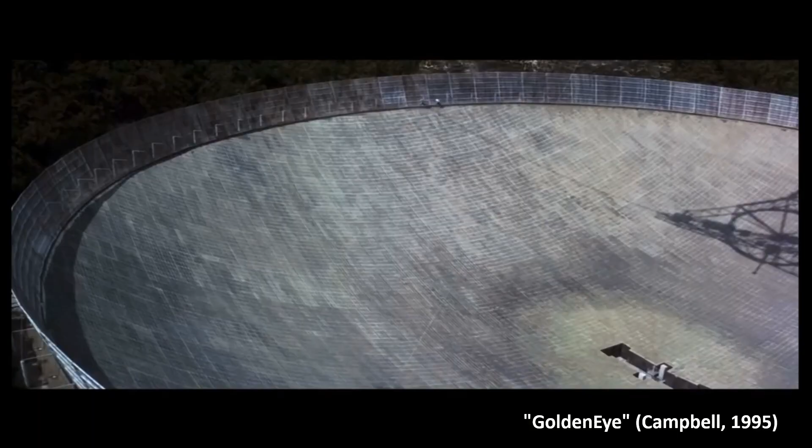That gives you a good sense of scale. There's some special effects there, but the telescope itself, that's real. That's how big it is.

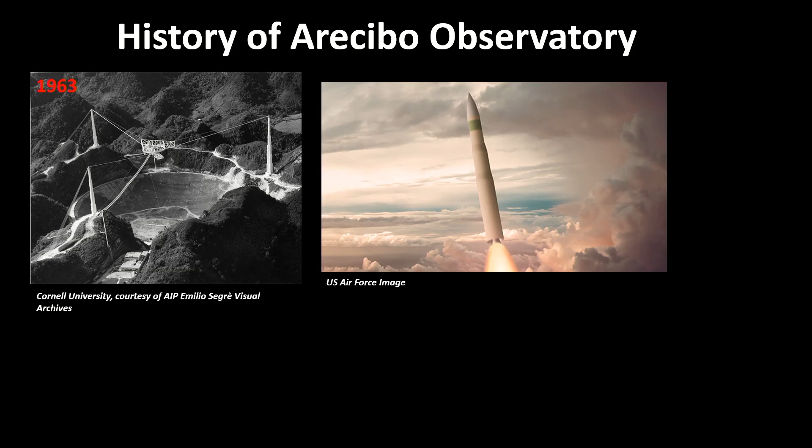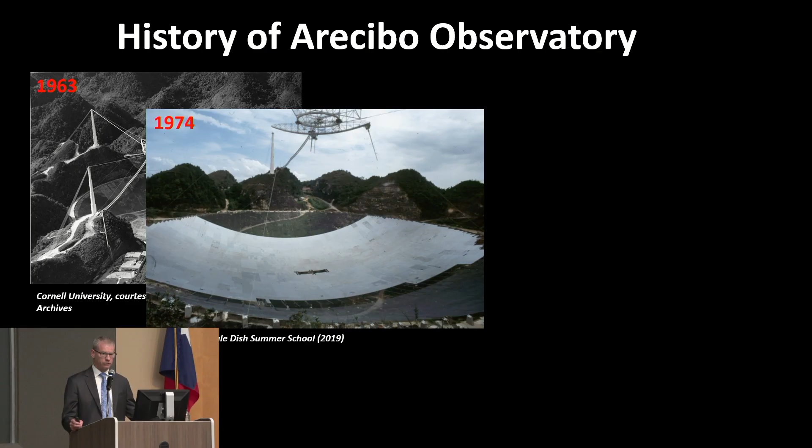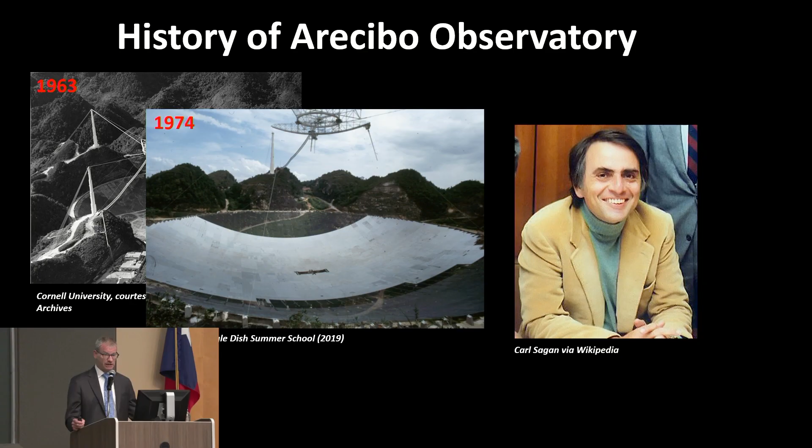It was built in 1963. It was built in order to detect intercontinental ballistic missiles coming in. It was given over by the military to the National Science Foundation in the late 1960s and turned into a scientific observatory. It was upgraded in 1974 — they put in a new surface on the dish and a new transmitter on the platform. It's probably most famous because it sent out what's known as the Arecibo message in 1974, which Carl Sagan was a part of. That was a message to the universe saying, we're here, we're intelligent, we have this big radio telescope. They even sent a picture of the telescope to explain how they were sending the message. And of course, they sent a Beatles song.

In 1997, it was upgraded again. And it has all sorts of accomplishments over its history, including the first evidence of neutron stars, and the list goes on and on. So it was a very valuable piece of equipment for the scientific community.

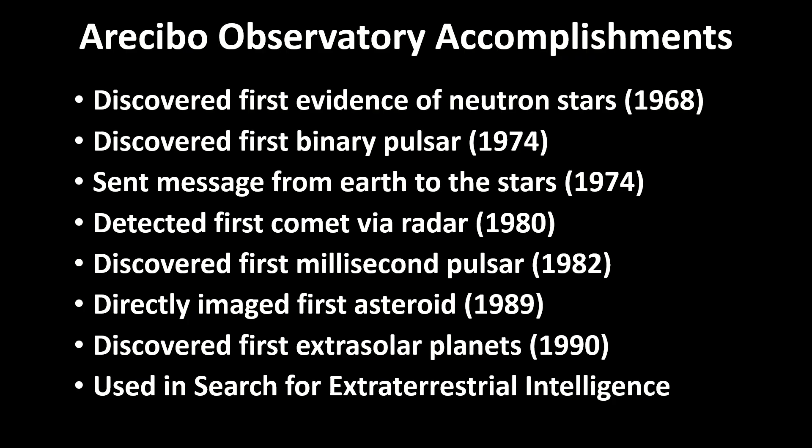In the early 2000s, the government stopped funding it as much. The National Science Foundation really wanted to move on. The scientific community fought back, and really over most of the 2000s up through 2015, there were people trying to get rid of the facility and people trying to hang on to the facility, and finally in 2016, they made a decision to keep going with it, and the University of Central Florida took over operation of it from Cornell University, which had been both the designer of the telescope and also the operator of that facility all the way through

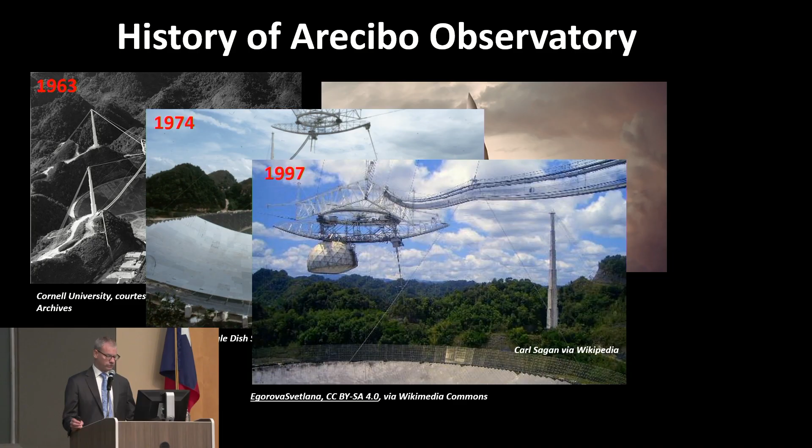2015. And then in 2020, it passed away. I'm going to show you a video. This has no special effects. This is not from Hollywood. This is real.

Had a big life and a big death. So what happened and why did it happen? That's what this panel that was put together by the National Academies was charged with.

We're not the only ones. Lots of people have looked at this. NASA did a lot of work on it, looking at the materials and what caused this to happen. WJE was a part of it. Thornton Tomasetti was a part of it. And then our particular panel put together a report that came out in 2024. So what I'm going to tell you is really a synthesis of all this work. The beauty of our report is that we were the last ones, so we got to use all the information that had been produced. So the structure itself.

The original structure had a platform that was suspended over the dish by a set of cables, and there were 3 towers. And on each tower, there were 4 cables that came to the tower from the platform. And then there was a set of cables, 5 cables on the backside of each tower that were backstays and anchored in the ground. So that was the original structure.

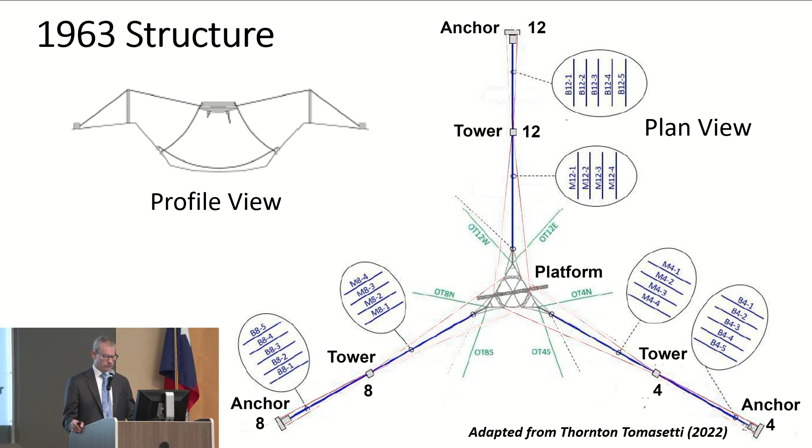In 1997, when they upgraded it, they added quite a bit of weight to the platform. And so they added additional cables called auxiliary cables. The original cables are now called the main cables, and the new cables are called the auxiliary cables. Those auxiliary cables consisted of 2 cables per tower that came off of the platform, and they're shown by the red lines in this diagram.

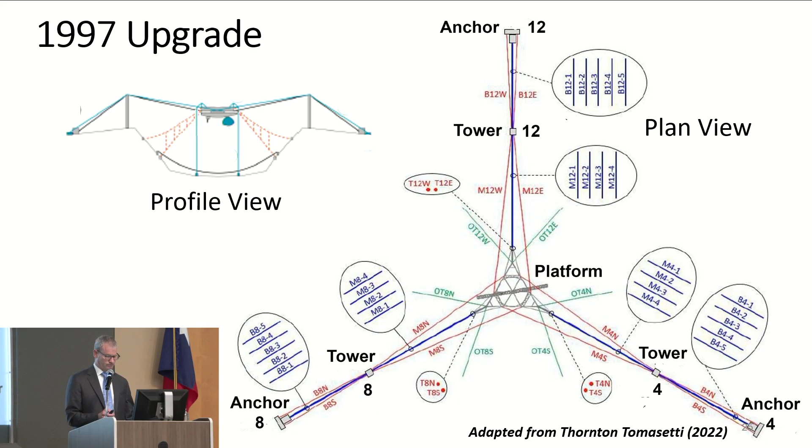The cables themselves are made up of a bunch of wires that are grouped together, anywhere from like 160 to 230 wires in each one of those cables. They end at sockets, which are steel sockets that have the wires terminating in them and are filled with zinc in order to create the connection.

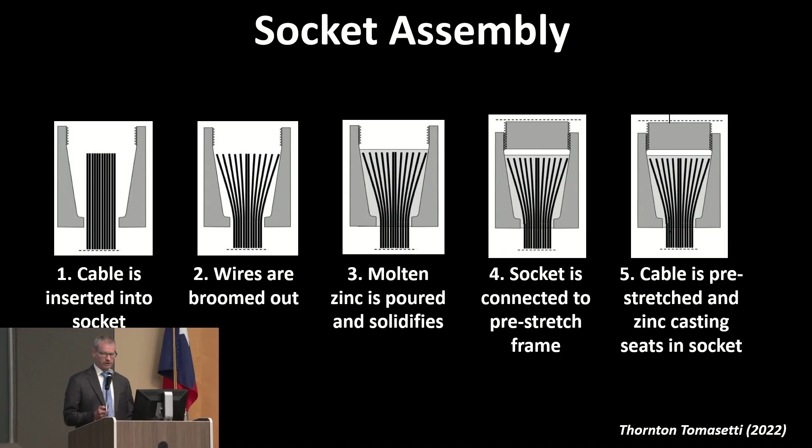So here's what that socket looks like in terms of how it's fabricated. The cable is inserted into the socket. The wires are pulled away from the cable, which is called brooming. Molten zinc is then poured into the socket, and as it solidifies, they then stretch the cable and lock that geometry in. So now the zinc is really, for the geotechnical engineers in the room, acting in bearing on the front of the socket. And we always like bearing capacity better than we like shear.

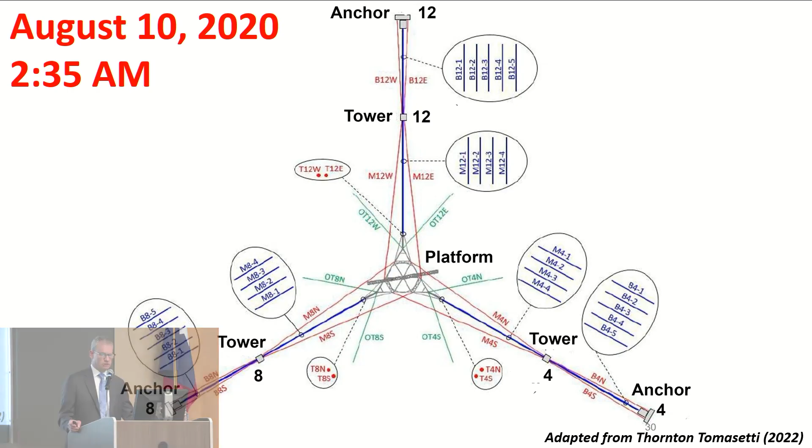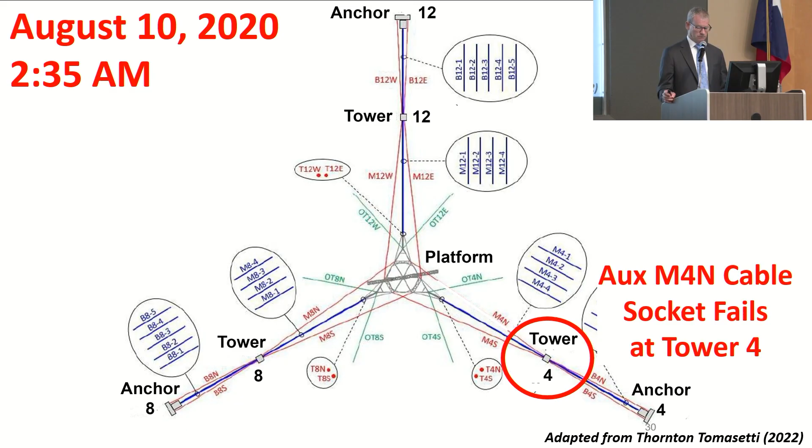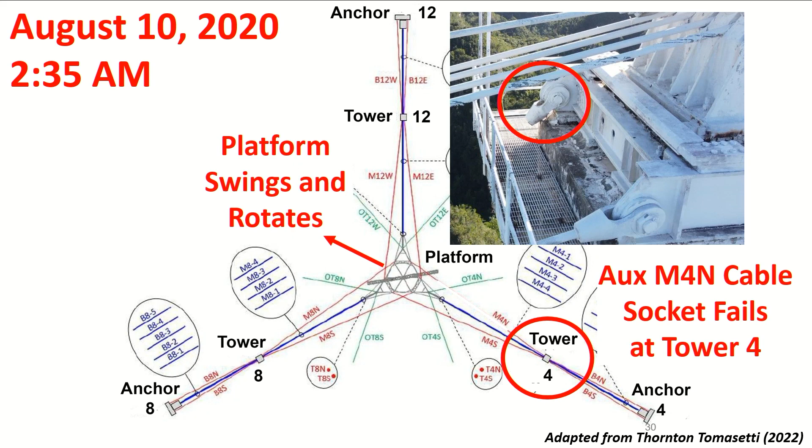The failure itself started in August of 2020. On August 10th of 2020 at 2:35 in the morning, one of the auxiliary cables broke, the one at Tower 4 specifically. And when it broke, it pulled right out of the socket. And because the platform is not symmetrically held up by those auxiliary cables, the platform swung and rotated and was damaged.

Here's a picture of it after that happened. So there's Tower 4 where the cable broke from. Here's the platform, which is now damaged because when the cable broke, it swung, rotated and moved in a way it wasn't designed for. And that cable weighed about 2 tons, so it smashed into the dish and damaged it.

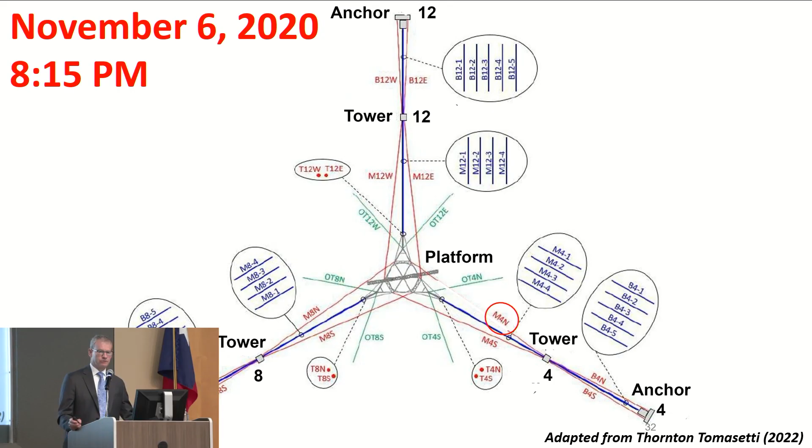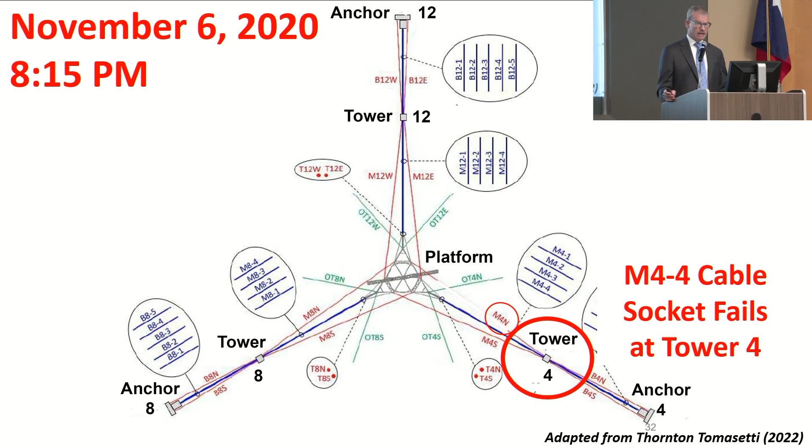They started looking at it, trying to figure out what they were going to do. They put together a plan to replace the auxiliary cables. On November 7th of 2020, they were going to get started, but they never did, because on November 6th of 2020 at 8:15 at night, one of the main cables at Tower 4 broke.

And this one, again, pulled out of its socket. Here's the back side of those four main cables coming in from the platform, and the one on the left you can see is no longer there.

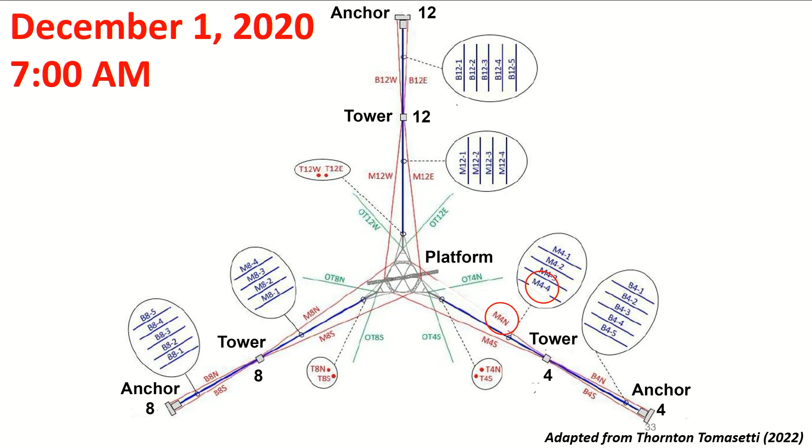At that point they decided they needed to take this thing down, that they weren't going to be able to save it, so they started developing a plan for taking it down. But before they could finish developing that plan, at 7 in the morning on December 1st, the remaining cables at Tower 4 that held up the platform all broke.

They knew Tower 4's cables were in peril, which is why the drone was sitting there watching Tower 4. In fact, there were workers the day before climbing around on the telescope, trying to figure out the plan for how they were going to decommission it.

Here's what happened in that video. The first thing that happens is a wire breaks on the second of the main cables coming into Tower 4, and then about 3 seconds later that cable gives way, and shortly thereafter each of the next two cables gives way. Once all those cables are gone, it's now pulling on that one last auxiliary cable that was left, and that's the last thing you see snap as the drone starts to look toward the center of the platform.

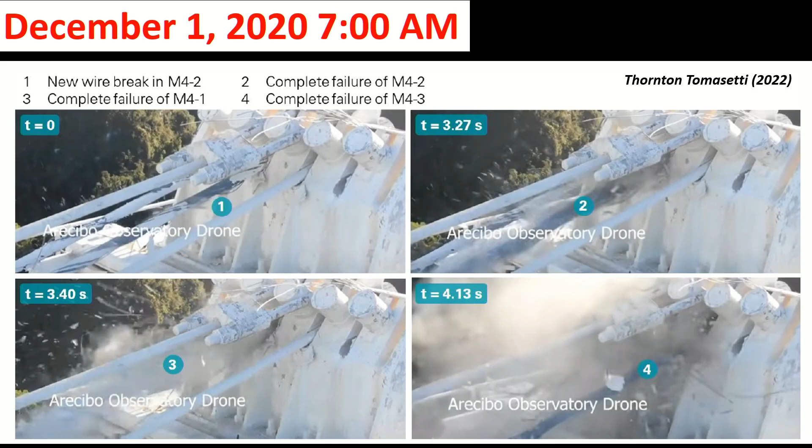I'm going to show you that video one more time now that you know what you're looking at.

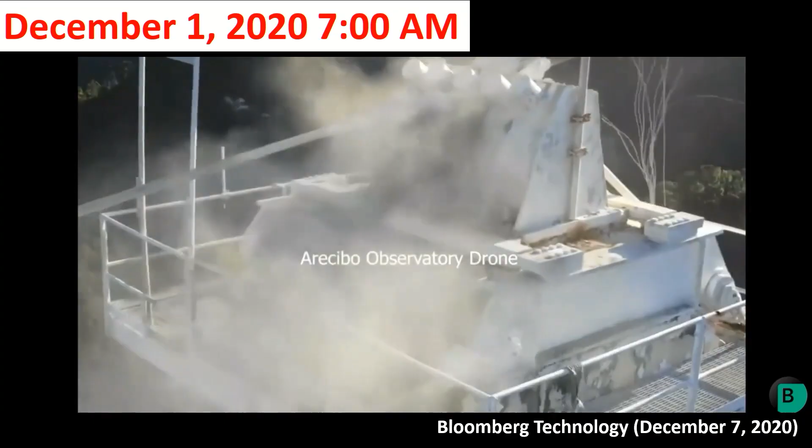So why did this happen? The sockets all failed, and it was pretty clear they were pulling out from the core. When you looked at the ends of the cable, you could see the part that used to be in the socket with the zinc around it, and it just sheared straight out of the socket assembly.

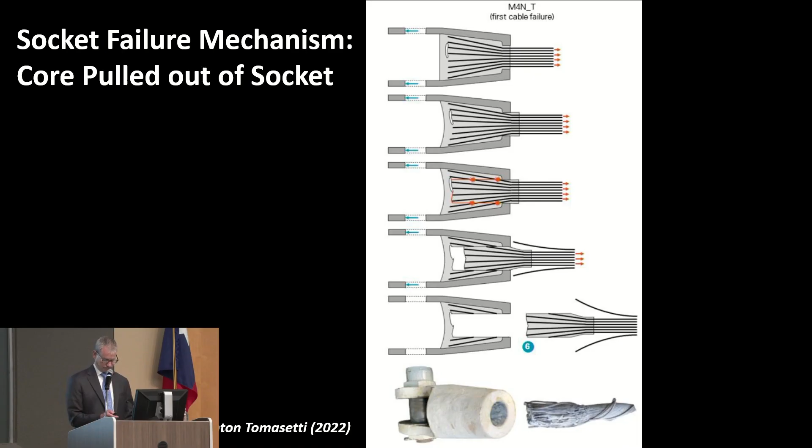The disconcerting thing about these failures was the first failure had a load less than half of the nominal capacity of that cable. We typically don't talk about the capacity of the connections or sockets themselves, we talk about the capacity of the cable, and the factors of safety are on the capacity of the cable. We just make sure the sockets are at least as strong as the cable. In fact, when they produce the sockets, they pull on it with a load to make sure it's the cable that's going to go, not the socket.

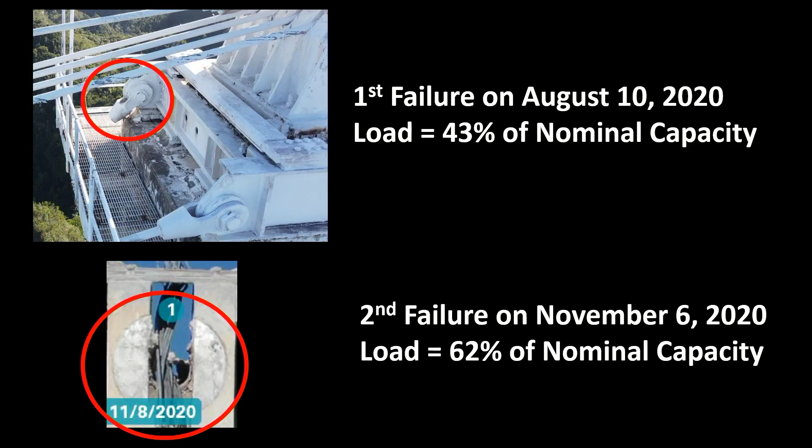The second failure again happened with only 62% of the nominal capacity on that particular cable. The important thing here is that as they were working on figuring out what to do and how to do it, they kept calculating factors of safety assuming the cables all had their nominal capacity, when they already knew one of them had failed in August with much less than its nominal capacity.

A number of different mechanisms were considered for why this happened. I think everybody immediately thought it had to do with corrosion, because we're here in Puerto Rico with a very corrosive environment - the zinc could have corroded, the steel wire could have corroded, the steel socket casting could have corroded. There were a lot of things that could have corroded. They had various measures in place to minimize the potential for corrosion, and in looking at everything, there was no evidence at all that corrosion had anything to do with what happened.

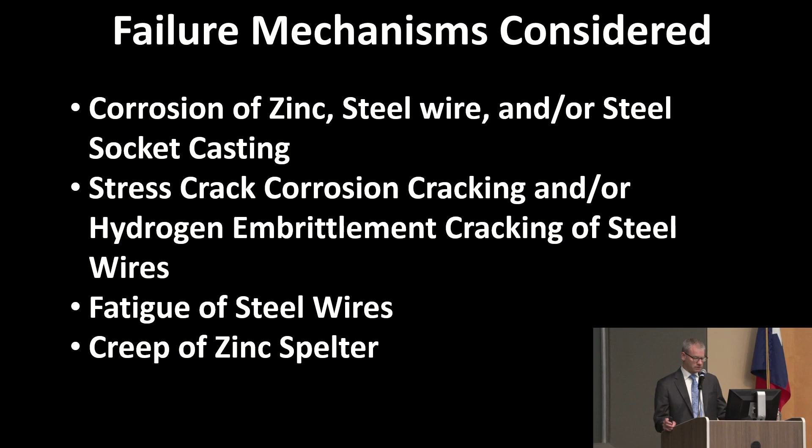Stress cracking and hydrogen embrittlement were also high on the list of what might have happened, but again there was no evidence of that. Fatigue of the steel wires right where they connected to the socket was another possible mechanism, but again no evidence of that, and it came down to the zinc spelter was creeping.

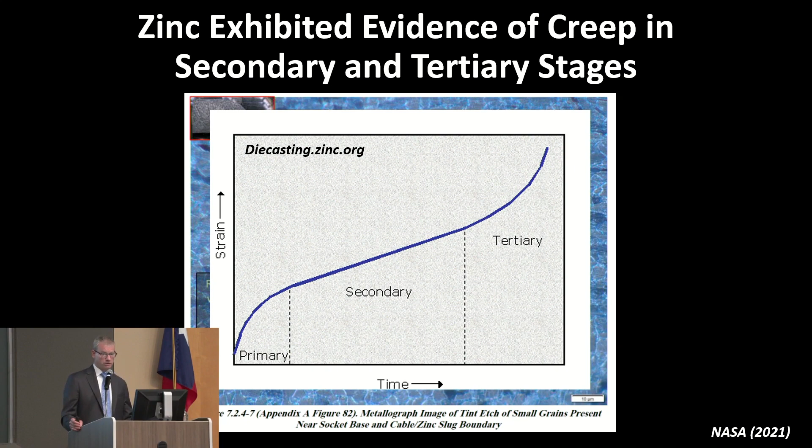The other interesting thing about creep is that the wire that first broke, the cable that first broke, was not one of the old cables that had been there for 57 years. It was one of the new, or younger, auxiliary cables.

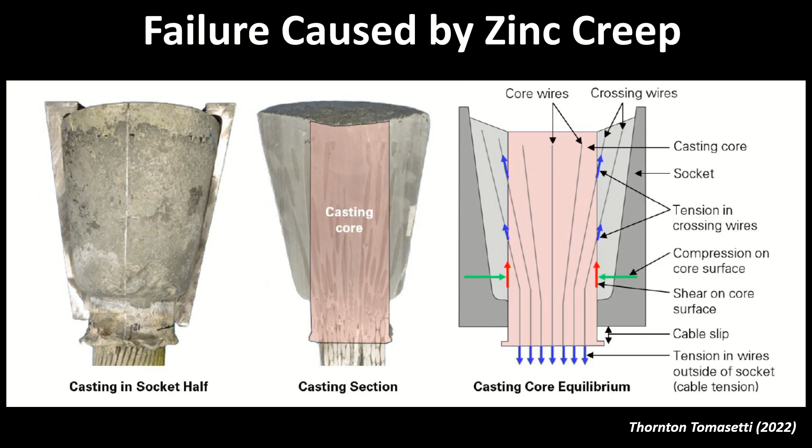What exactly was happening in terms of the mechanism is shown with this schematic. So when you cast the zinc in there and then pull on it, the zinc goes into shear, and as it goes into shear, the wires in the broom start to pick up that tension, and you come to an equilibrium point, and the zinc actually goes into compression. It arches right at the base of that socket, which is where it gets its bearing capacity from. The idea is that this happens when you first pull on it, and then it sits there at equilibrium forever.

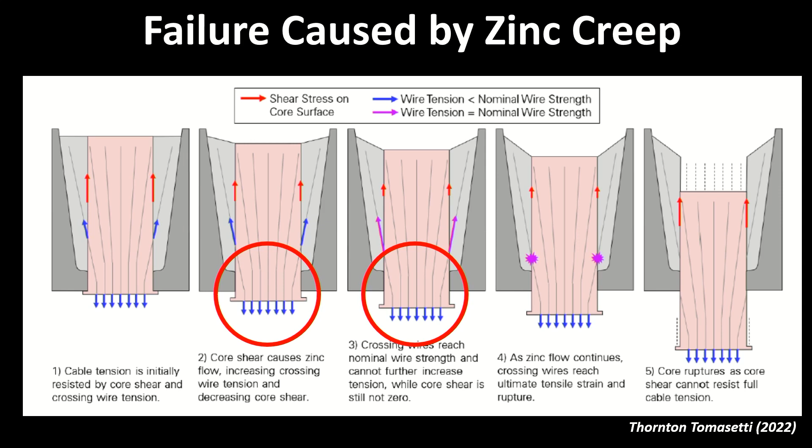But what happened in these particular sockets was that as it pulled on it, and as the zinc was in shear at equilibrium, instead of staying there, it started to flow. As it started to flow, that meant the socket started to move, and that meant the wire tension started to go up, and eventually the wires broke, and then the socket was held in place only by shear in the zinc, and it couldn't hold that load anymore.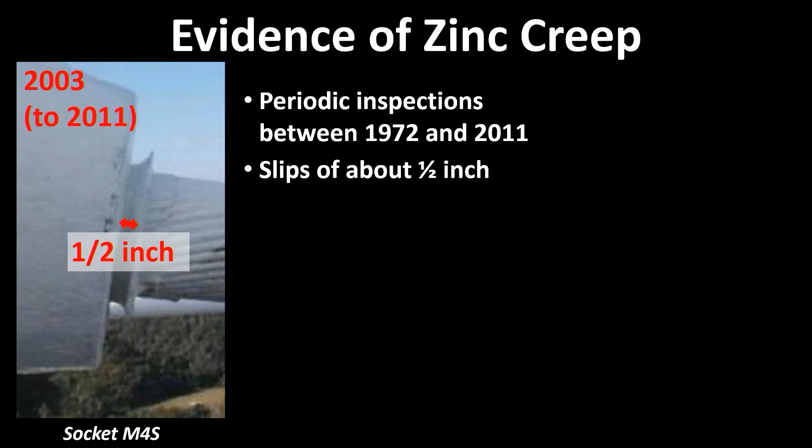Here's some evidence of that zinc creep. The sockets you would expect, when you put that seating load or initial load on them, would move about half an inch. That's what almost all of the sockets here at Arecibo looked like. Here's an example from 2003 of a picture of one of those sockets. You could tell whether things were moving or not because they were painted from time to time, and if the paint was no longer continuous, you could tell the socket was moving. There was no evidence of that for all of the sockets, including this one, between 2003 and inspections all the way through 2011.

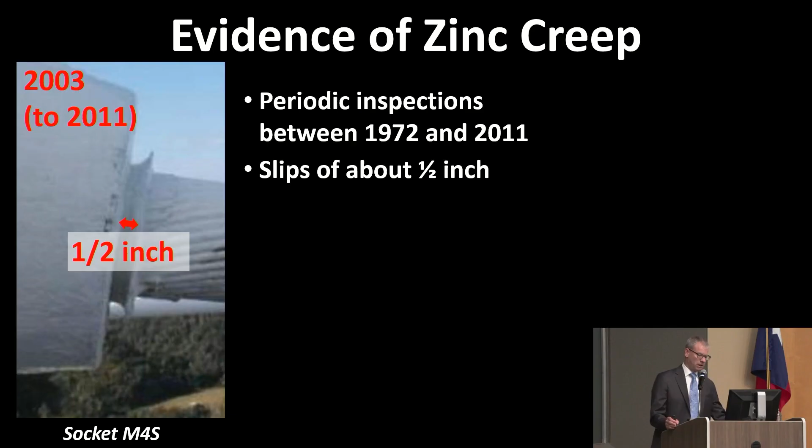However, after Hurricane Maria in 2017, they noticed that several of the sockets had much bigger pullouts. So here's the socket that failed in 2020, a picture of it in 2019, where instead of half an inch, it's now over an inch of pullout. You can also see the paint - you can see how that part was never painted because it used to be inside that socket and it's no longer inside that socket. Now, the loads in Maria were not significant.

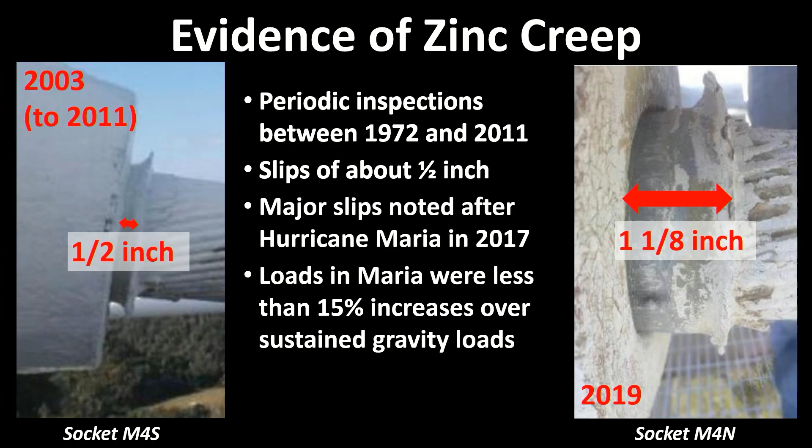The biggest increase for any one of the cables in this whole system was 15% over the sustained gravity load. This cable, M4N, which is the one that broke, was loaded negligibly in Maria because of its location relative to the wind field. In fact, the tension might have gone down a little bit in Maria, not increased. And yet that's where we see the evidence of the slip.

The conclusions - I was happy at this point as an engineer because I figured, okay, these sockets broke, they broke unexpectedly, but as engineers we're always thinking about making sure that things like this, if they were to happen, aren't going to take the system down. So the conclusions are all related to that.

Number one, providing redundancy is important. The auxiliary cable system, where there was a single cable along each one of the load paths, did not have redundancy. That meant when one of the cables broke, the system distributed loads in an uncontrolled manner, and that caused damage to the platform. It also meant that if you were going to replace one of those cables, it was very difficult to do in service.

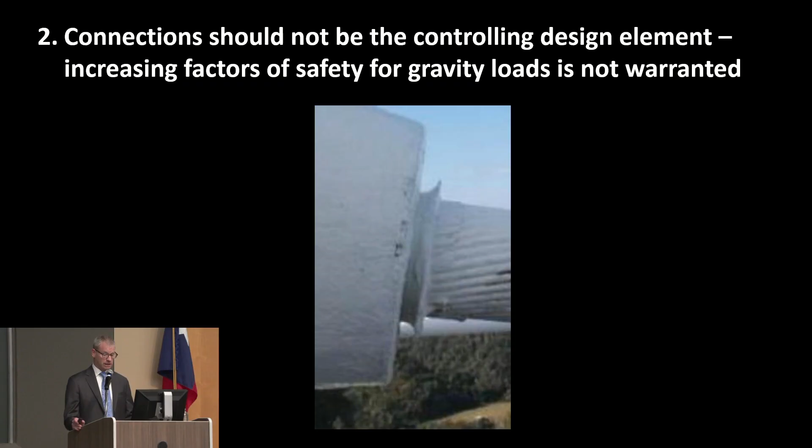So I hope if you take nothing else from this: if you're in some committee meeting and someone says, 'Thornton Tomasetti said for cable-stay bridges we should increase factors of safety because of what happened at Arecibo,' say no, that's not right. That's not going to help us, and that's not a valid conclusion to draw from what happened at Arecibo.

The third lesson is that you really need to keep track of what's going on, and it's best if the designer at the beginning figures out what's important - what to look for, how much socket pullout is okay and how much is not, how many wire breaks are okay and how many are not - so that the people inspecting it have a guide as to what they're looking for, and the people operating it have a guide as to what to do when they see something like 1.5 inches in one case of socket pullout.

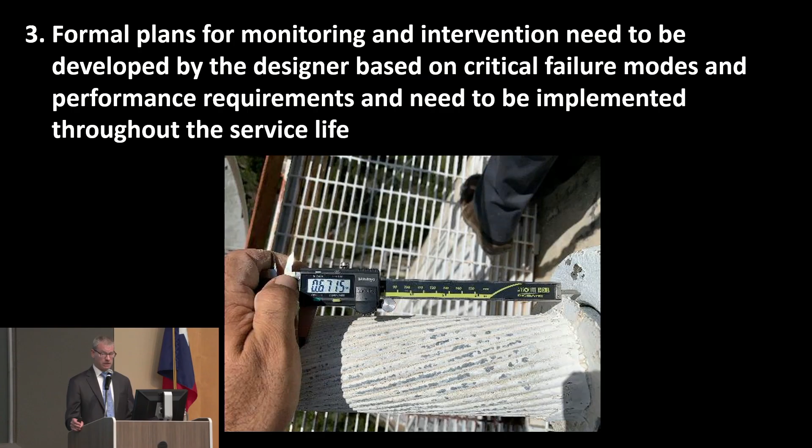The fourth lesson is that actions need to be taken quickly when an element needs repair or replacement. They knew there were some damaged cables after Hurricane Maria. They had a plan to replace those. As of August 2020, about three years after Maria, they still hadn't done that. When the first cable broke, they started planning and figuring out what to do, doing calculations and looking at the loads on the other cables. While they were doing all that, the next cable broke. Then they started planning for decommissioning, and while they were putting together those plans, the whole thing just fell down. So you really need to act quickly - you need to be ready when something goes wrong to act.

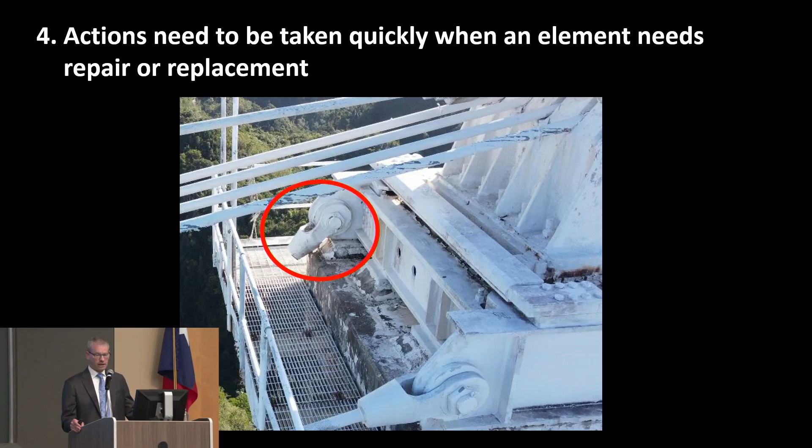And then the last lesson is the safety of the workers - both the scientists, and then after that first cable broke, the engineers trying to figure out what to do - and the public. You see where that cable from Tower 4 broke and smashed into the dish. If that had been on Tower 12, which is in the foreground, that's where the visitor center is, where the public would go to look at this telescope. If that cable had broken when there were people on that platform and it broke on that tower, that potentially would have put those people in peril.

And yet, in all the decisions being debated about whether to keep this telescope going or not, they even did an environmental impact statement where public health and safety was one of the factors considered. In that analysis, they never talked about the possibility that the structure itself was in peril. The only thing they looked at in terms of health and safety was that this telescope could potentially detect asteroids coming at the Earth, and therefore protect the general public. So they were worried about an asteroid hitting the Earth - they were not worried about somebody climbing around on this structure.

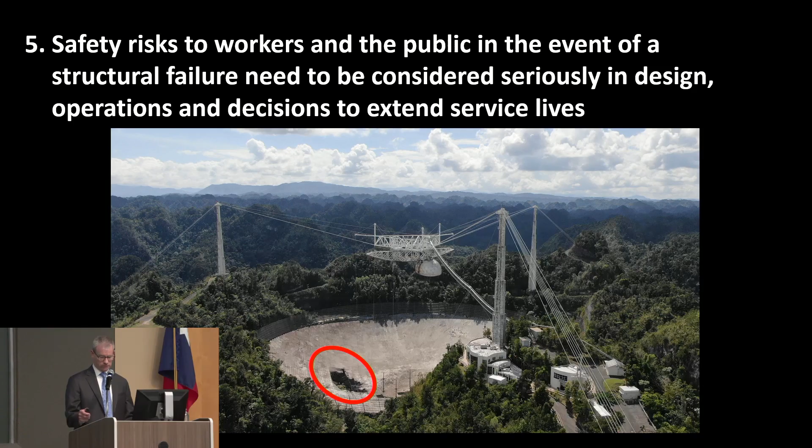I do a lot of work with the offshore oil and gas industry, and we have analogous structures. Everybody working on this telescope talked about how unusual it was that you had these cables under sustained tension, and maybe that was the problem. Maybe we shouldn't be putting cables under sustained tension. Well, we have a lot of experience in the offshore industry putting cables under sustained tension.

For example, the spar structure out in the Gulf of Mexico—again, a very large structure like Arecibo. The mooring system is a set of cables connected to the platform and to anchors at the seafloor. Those cables are under sustained tension under normal service conditions, and then go into increased tension under extreme loading conditions.

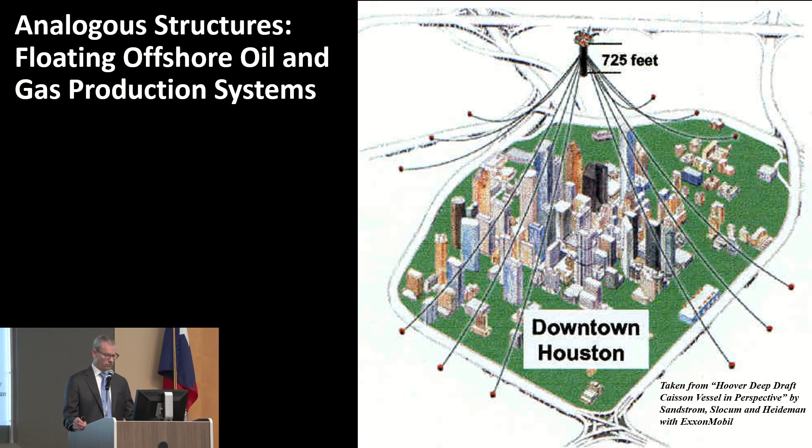Some of the lessons: we've been operating those floating production systems offshore for about 25 years at this point. The first is that these lines do fail. The failure frequency for the offshore lines is about 2.5 times 10 to the minus 3 per cable per year, which is consistent with Arecibo.

If you took that rate and applied it to the cables that were there for 57 years, and the cables that were there for 23 years, and figured out how many cables you would have expected to have broken in the lifetime of that facility, it would have been 4.5. In fact, 4 of the cables at one time or another had broken during the lifetime of that facility. So that experience is very consistent.

The majority of the offshore failures, like at Arecibo, are at connections. The offshore failures are nearly always caused by a reduction in capacity at the connection rather than an overload, which is exactly what happened at Arecibo. We've concluded that larger factors of safety in offshore design wouldn't prevent the failures, because they're not failing due to overloads. They're failing because things get damaged during installation or things deteriorate, generally because of corrosion or hydrogen embrittlement. That's also similar to what happened at Arecibo.

However, we have never had experience with creep like this in one of those connections. Two things are not like Arecibo. One is these offshore systems are designed for at least one line to be missing. We just assume at least one of the lines is not going to be there, and the system should be just fine under that condition—it takes more than 2 lines generally for one of these systems to fail.

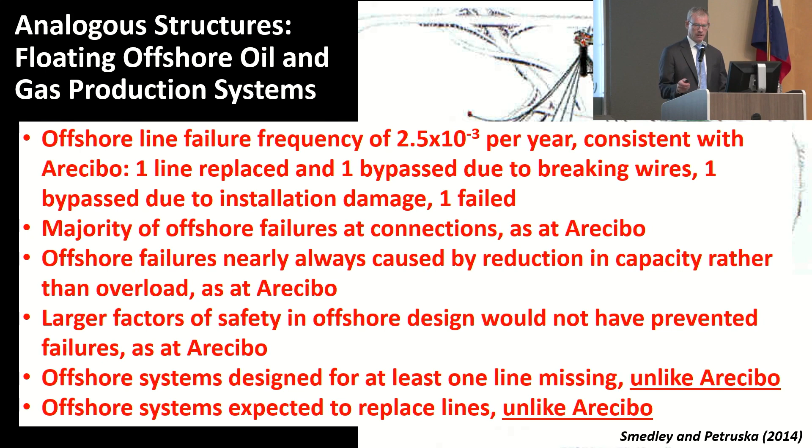The one question, though, that is troubling is why zinc creep? We've got about a century of experience with these kinds of sockets, and never, to our knowledge—and there are people on my panel who have connections, no pun intended, and a lot more experience with these types of sockets—have ever seen something like this happen.

We have a hypothesis that it might have something to do with what's called electroplasticity. What this is: if you stick a current through a metal like zinc, the flow stress—the stress at which it starts to flow—is reduced. And the bigger the current density, the bigger the reduction in that flow stress.

This was discovered in 1963 with zinc, in exactly the same year that Arecibo was constructed. The Arecibo telescope was the most powerful radio transmitter on Earth. So this platform was transmitting an enormous amount of electromagnetic energy, and potentially there were currents running in these cables, and those currents had to go somewhere.

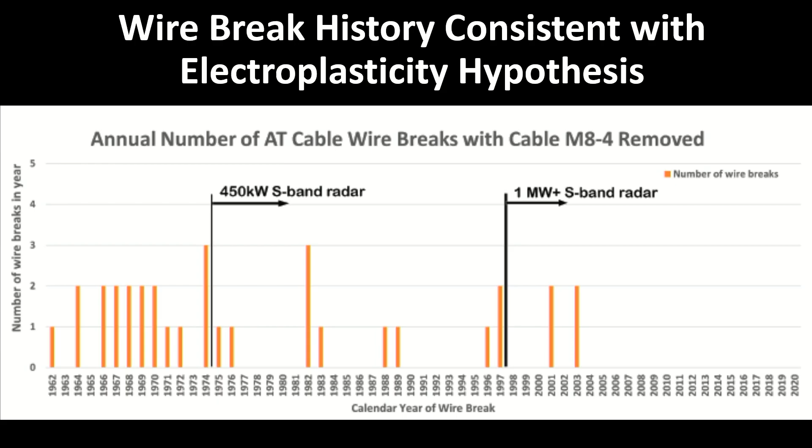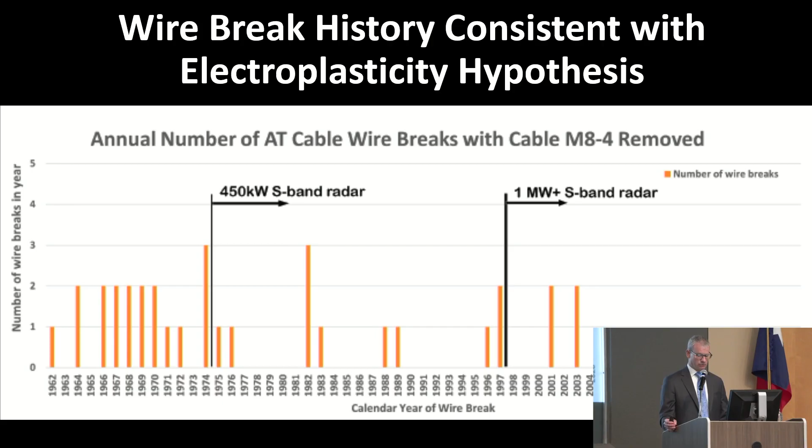And when they upgraded it even further in 1997, the wire breaks really reduced in frequency. So one possible hypothesis for why that was happening is if the bigger electrical currents were allowing the zinc to flow, then that was reducing the stresses on the wires and they weren't breaking as much.

The second piece of circumstantial evidence is where the cables were that had the most pull out at the sockets, and particularly where the ones that failed were. They were at the tower. The same exact sockets were at the platform end of every one of those cables, but there was never any evidence of just pull out at those cable ends, nor is that where the weak link was in this system when it ultimately came down. It was always at an end far away from that platform, which also potentially makes sense in terms of that transmitter and how those electromagnetic waves are getting pushed out from that platform. It might affect those tower connections more than what's right next to the platform itself.

Again, it's a hypothesis. We don't have any measurements of what the currents were in these cables.

The other thing to note, though, is where the pullout was, where cables were terminated in a certain way. So it was specifically where cables were terminated in a way that the only way, if there was an electrical current in it, it could pass would be to go through the zinc in the socket. Some of the cables had grounds naturally in the way that they were connected so that there was another pathway. Some of them had multiple pathways where a current could have gone. But the auxiliary cables in particular were the ones that were the most susceptible potentially to this kind of a phenomenon because they weren't grounded in any way. So if the current was going through that cable and it got to that socket end, the only way it could go was to go through the socket itself.

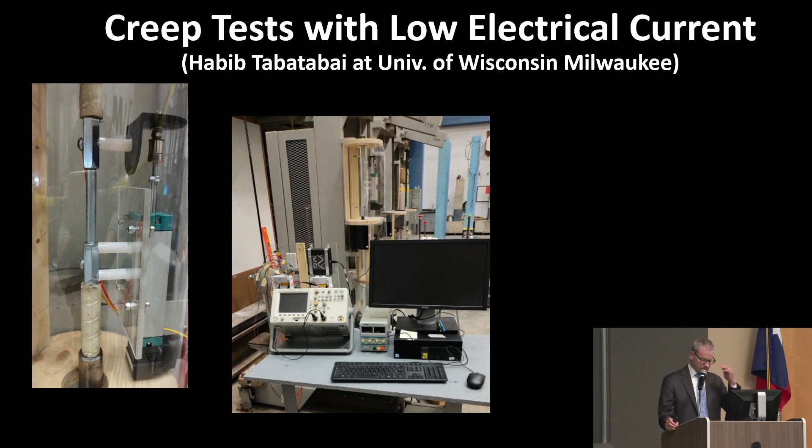After the report came out, he started running some tests at the University of Wisconsin-Milwaukee where he put pure zinc wires in tension at about the same level of tension as they would have been in a relative sense at Arecibo, and then passed a small current density through them, orders of magnitude smaller than what I showed you on that plot with the evidence of electroplasticity in zinc, and he found that they were moving. He's only run tests that have gone out like 7 days so far. He's setting it up again, and he's going to run something longer. But so far, the evidence is that at very low levels of current, the zinc is flowing.

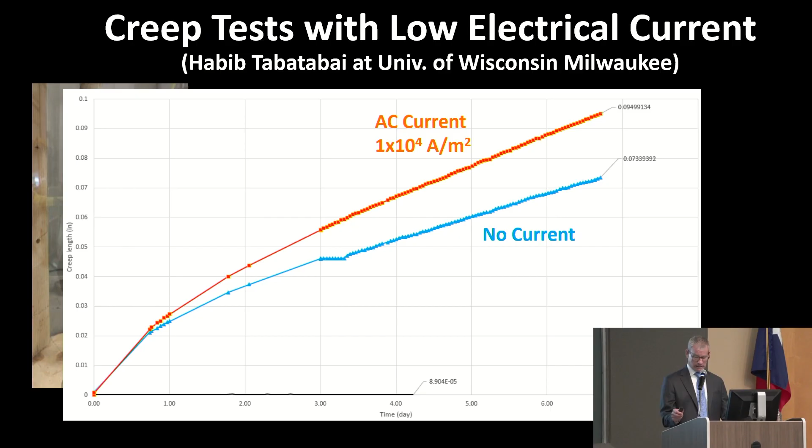So in summary, I think it's a pretty simple case history in that we should always be expecting the unexpected. We should have a plan in place for when it happens, and we should act quickly to mitigate it when the unexpected happens. With that, I would like to thank David again for your service, and I would like to acknowledge Ramon Carrasquillo. Ramon, I miss you. Thank you very much.